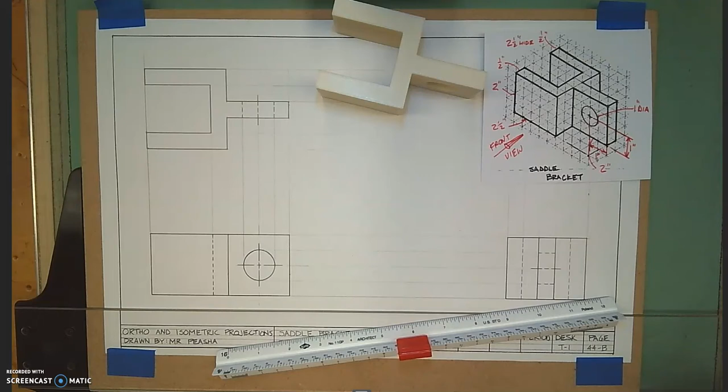Welcome back. The purpose of this video is to demonstrate how to draw the isometric view of the saddle bracket drawing. I have the 3D object here. This view right here is the isometric view that we need to draw, and we need to locate it here within our working space. Now our working space is defined by the area inside of the border lines.

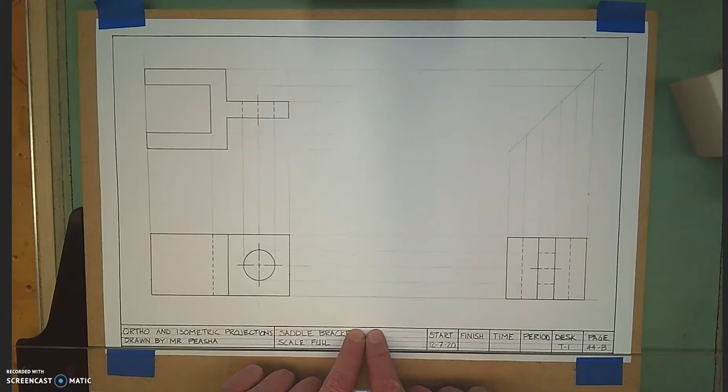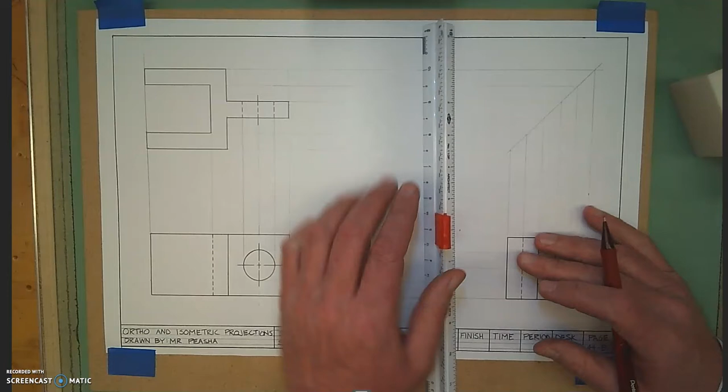So above the title block, that top line on the title block is a border line. So we're going to be working within those border lines. We call that the working space. Your instructions tell you to measure 5 inches away from the right-hand border line. So I'm going to make a measurement of 5 inches horizontally. And the instructions say to measure from the top border line down 6 inches. So I make that measurement and make that mark. That will be my starting point for my isometric view.

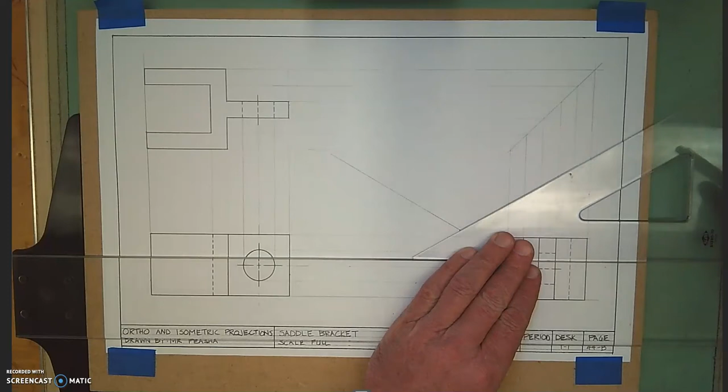For this drawing, every line, with the exception of the lines that create the circle, is going to be drawn at a 30-degree angle. So every line is going to come from this 30-degree angled line. Now, I'm not going to use this sketch to define how big each line is on this isometric. The way I'm going to do this is I'm going to take every measurement right from my front, my top, and my right side view.

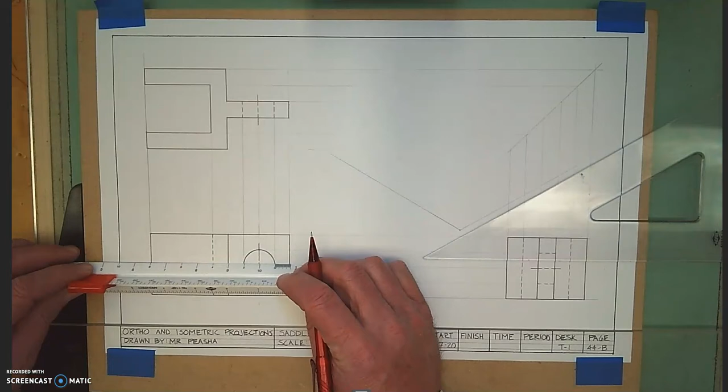So the first thing I'm going to do is I'm going to make a measurement for this section right here. Well, that measurement from my drawing is 2 inches. So I'm going to mark off at 2 inches. I'm going to make another measurement for the overall length, which is 4.5 inches. So I'm going to mark that off at 4.5 inches. So now I'm going to have a vertical line here and a vertical line here. I'm drawing these very lightly right now.

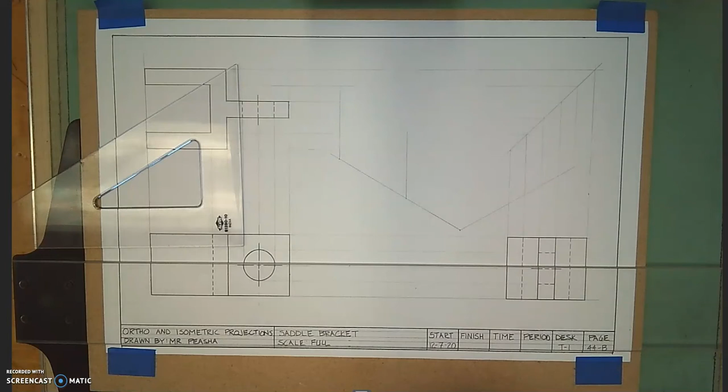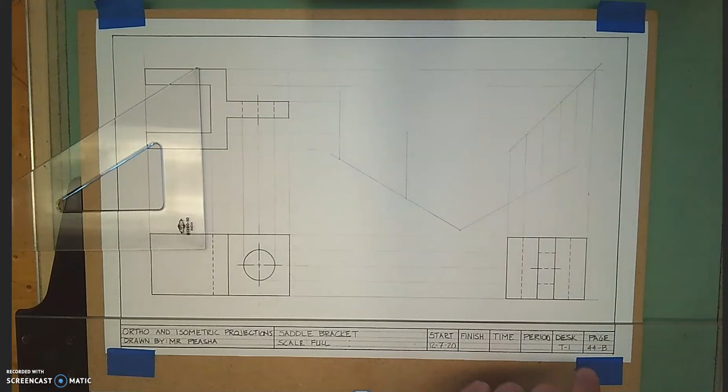Now for this front part, to get to this point, I need the length of this line and the length of that line there. I can measure those either from my right side view or from the top view. It doesn't matter which view I use. So I'm going to measure directly from my right side view 1 inch and then another 1/2 inch, and I'm going to finish at 2.5. So I have 1 inch and then another 1/2 inch, and then it's going to go all the way to 2.5 inches for that line.

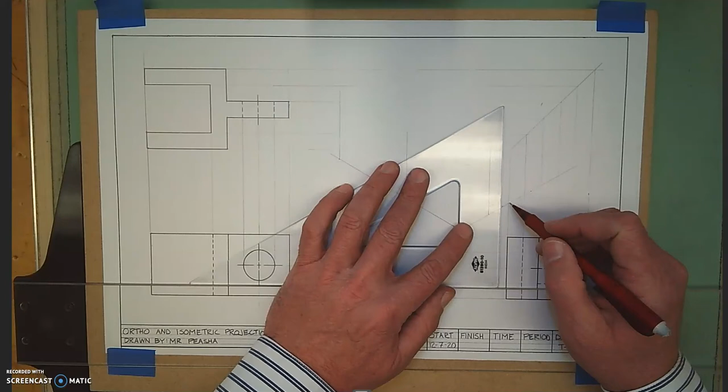So these lines, I'm going to do a little erasing here to make a little bit of room for my drawing. You can leave your guidelines here. Those projection lines do not need to be erased. But I'm erasing them a little bit here for the sake of this video. I'm going to draw those lines in there, and I'm going to have another vertical line right here. So all I'm doing is taking these measurements directly from these views.

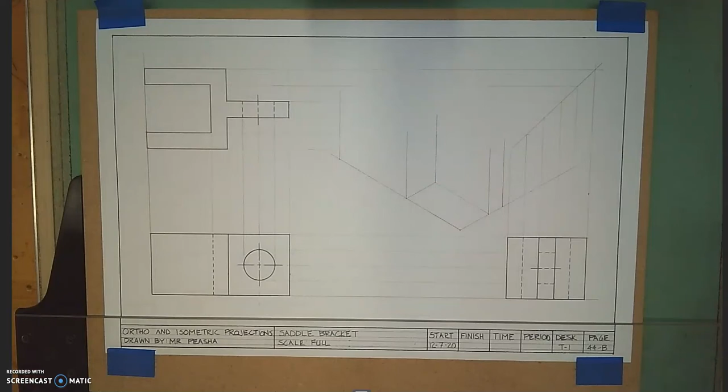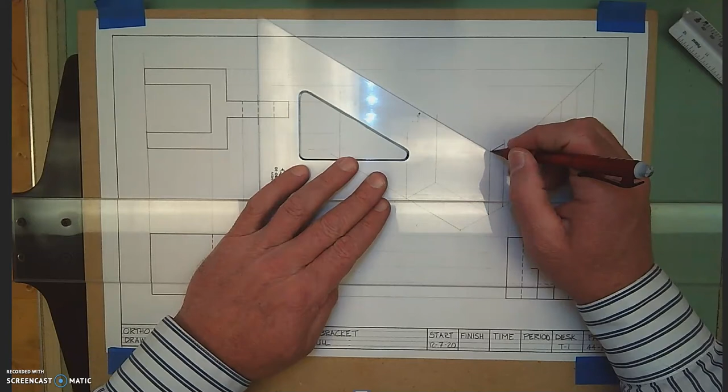So now I need the height. Well, from the front or the right side view, I know that distance is 2 inches. So I'm going to make a measurement right here at this line at 2 inches. And that's going to define this line here. It's going to define this line right here, which will define this line, and then this line here.

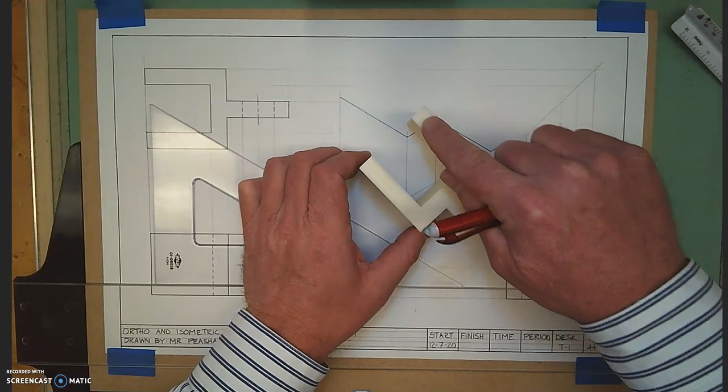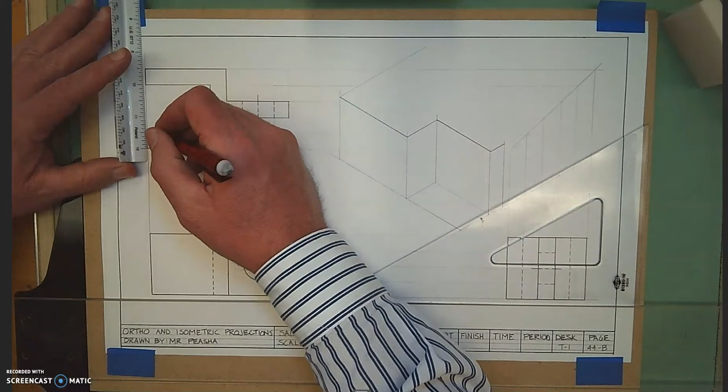So now what I have to do is identify these points to finish this top part. That'll go relatively fast, but I do want to draw a line here so that I can make the measurement for these pieces here and here. I'm going to do that by measuring this top view. So I'm going to make a measurement here. It's 1/2 inch, and then it ends at 2.5, and it comes back 1/2. So you can make those measurements directly from that top view. So here's where it ends at 2.5, and it goes 1/2, and then another one.

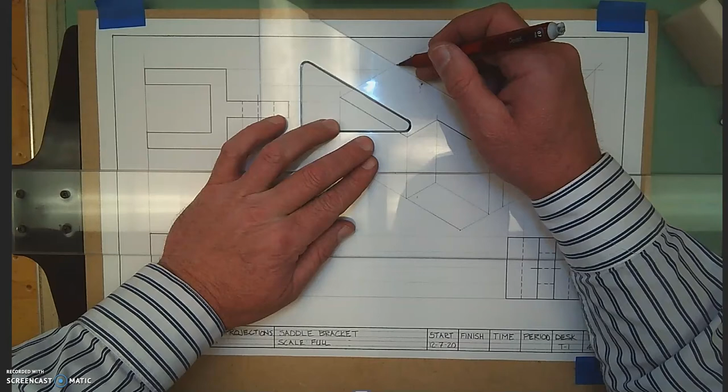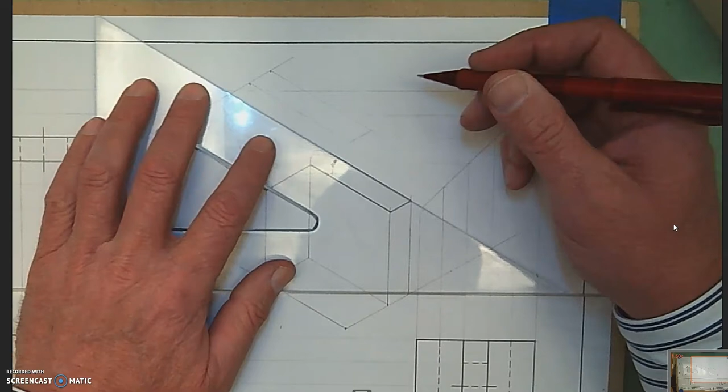So those lines now are going to identify this view. I'm going to draw a few lines in lightly to get started here. And then I'm going to draw a light line here. Now I'm drawing these lines pretty lightly, so let me zoom in a little bit. But once I've developed those measurements from my orthographic projection, I now know all of the lines or measurements that I need to create this drawing. I'm going to make a measurement here.

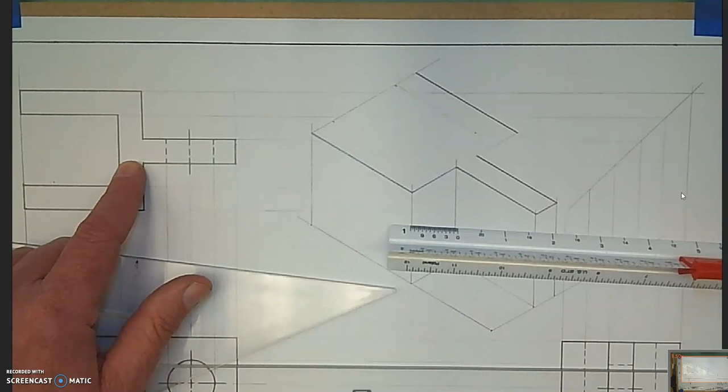Okay, so how would I know then how thick this portion is right here? It's this portion right here. How thick is that? Well, I can take a look right on this drawing and I can measure that, and that measures out at 1/2 of an inch. So I went ahead and made a measurement there at 1/2 of an inch. I set that measurement out.

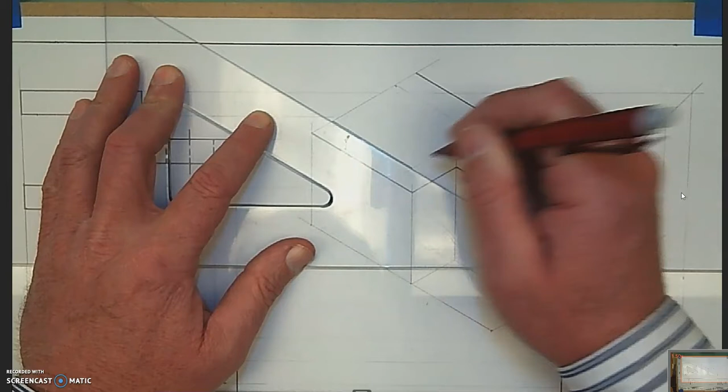I'm going to lightly draw a line in so that I will know where it converges, and I can heavy in a line right there. I now know where I can heavy in that line. Okay, now there's a couple of lines missing, and I'm going to heavy in now all of the vertical lines.

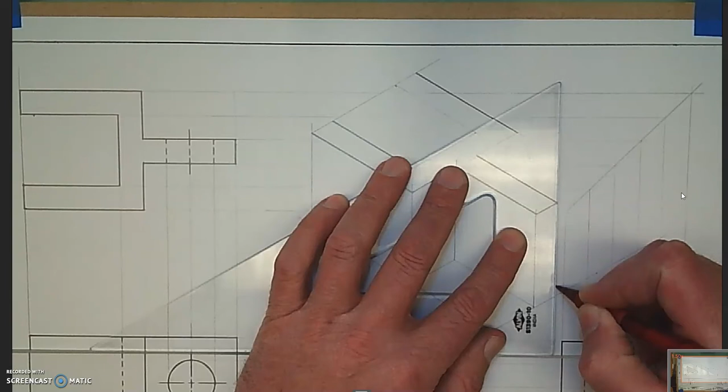Because I'm right-handed, my pencil is on the right, my triangle or my straight edge is on the left. I'm going to start at the furthest right-hand line, and I'm going to heavy that in. I'm going to work my way to the left, heavying in, or darkening, if you want to say it that way, each and every vertical line. So when I'm moving across here, I'm not sliding the triangle over the drawing, smearing the graphite.

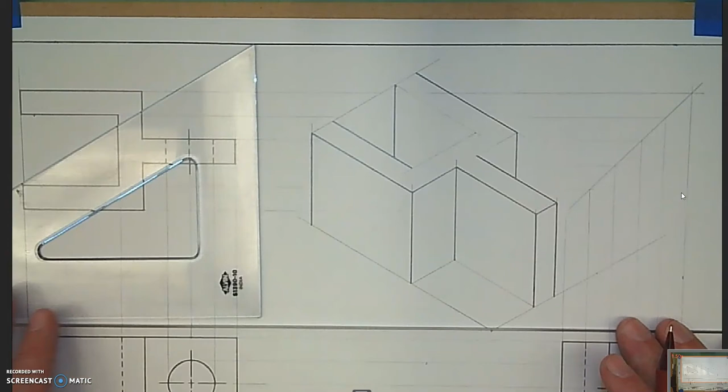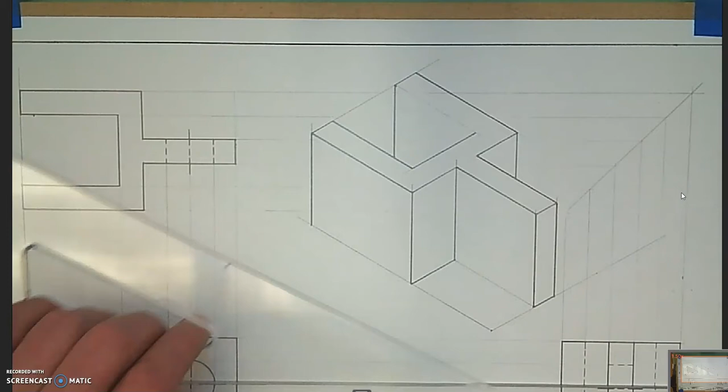So I'm going to heavy in every vertical line. And now I'm going to do the exact same thing with all the lines that are working basically in this direction that you see me working right now. Got one more line to do here. It looks like I have a couple lines here on the bottom to darken in, or heavy in, thick. And then I'm going to turn the triangle over, work from the top down in this direction here.

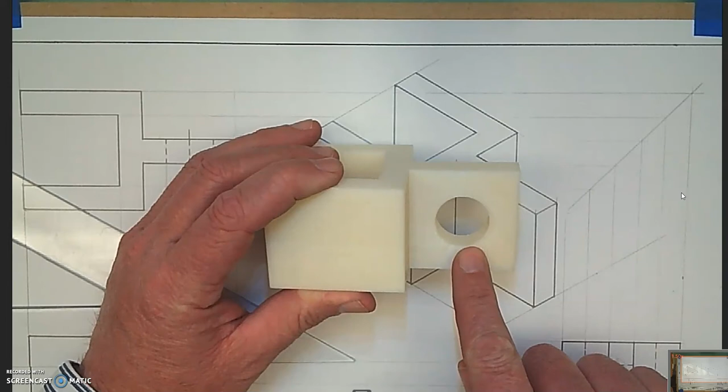Now, that isometric view is done, it's complete, with the exception of this hole right here. Whenever we draw a hole or an ellipse or a radius or a curve, we need to identify the center point. Well, the center point can be identified from this front view down here. You can look directly at this front view and make your measurement. And I remember measuring 1 inch over and 1 inch up.

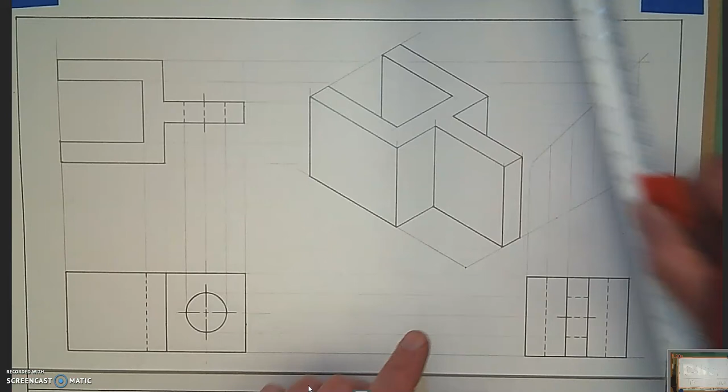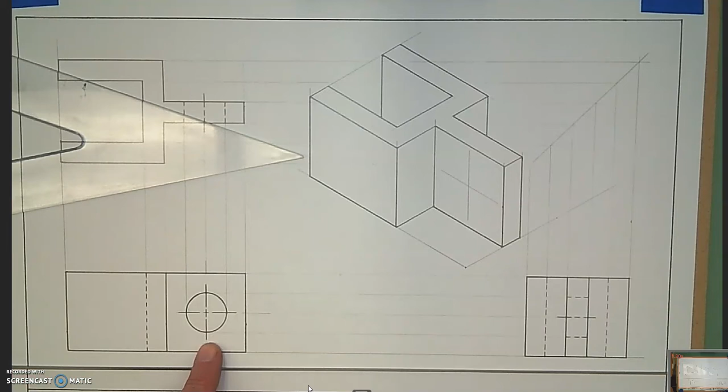Because all these lines are on the grid, they're all true length. So I can measure up 1 inch and over 1 inch. And I'm going to lightly draw in some center lines so that I can draw in an ellipse. Now, at this point, we've discussed this already, this circle has a diameter of 1 inch. That means that the circle or the ellipse is going to cross these x and y coordinates 1/2 of an inch away from the center. So I'm going to go ahead and make measurement on my drawing that shows where this ellipse is going to cross.

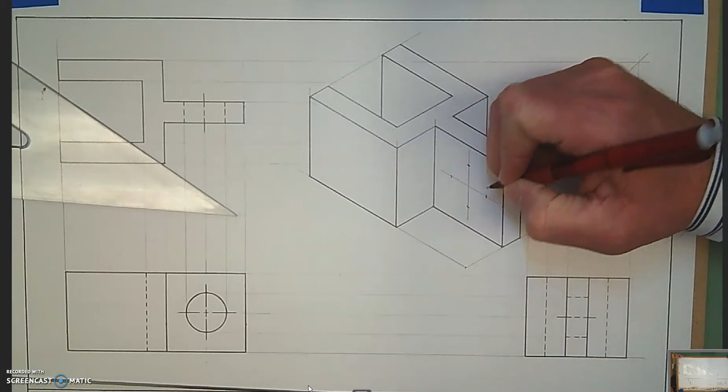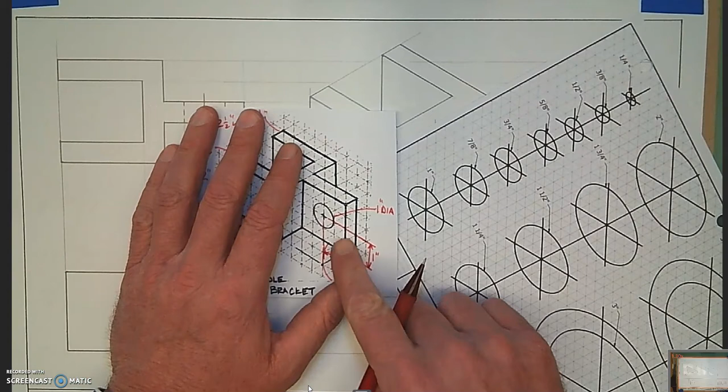Now, the way you're going to draw this ellipse at home, you're going to use the ellipse template I supplied to you. You're going to find the 1 inch ellipse, and then you're going to compare that to the sketch. You're going to rotate this until your ellipse is in the same direction as the sketch is. And here's a hint. Do you see this X coordinate right here going across? Well, that's this line right here. You have to rotate it and work it a little bit. If you want to, you can even put these larger ellipses and line it up on your screen so you know which direction.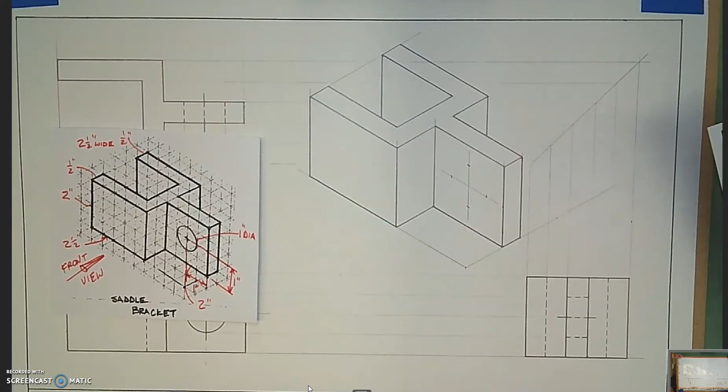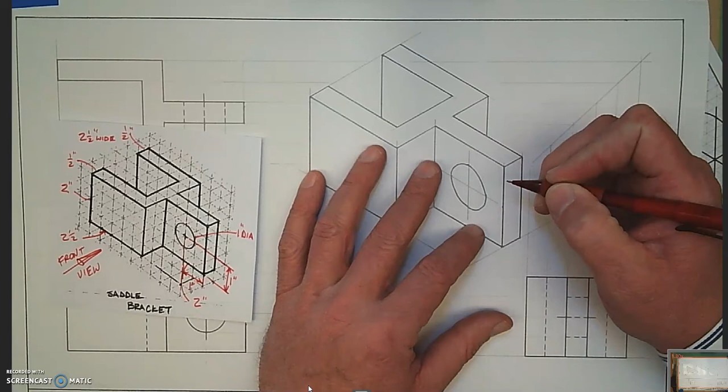Now you're going to trace this ellipse onto your drawing by removing tape just like you did the circle in the last video. So you're going to slide that underneath there to where the 1-inch template goes directly under. It looks like I'm going to have to remove the tape on this upper corner too. So where that ellipse goes directly underneath, it's going to line up with those 4 measurements you made, and now you can trace that ellipse. Now I know that's not going to be perfect, but at least that's really, really close.

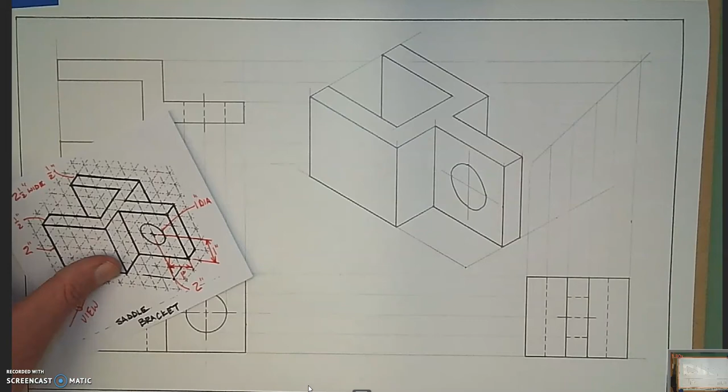Now, if you were in class, we would be able to use what's called an ellipse template. You would rotate the ellipse template to fit, line it up with the X and Y coordinates, and trace that ellipse template. But that's okay. We don't need to use this. We can trace the one I gave you. Okay? So then, this is what the completed drawing should look like. Let me move this out of the way, and I'll put this in your view so you can see. There is the orthographic projection, which is the 3 views, as well as the isometric view of this drawing.